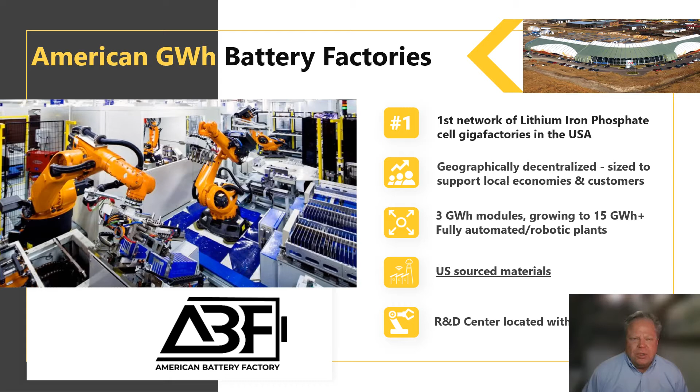The U.S. should support cell production, which uses lithium iron phosphate chemistry, or simply LFP, not just because it's an American invention, but because it's safe, mature, low cost, has wonderful longevity, can be 100% charged, doesn't contain nickel or cobalt, which is a near conflict material primarily provided by child slavery.

LFP cells are ideal for use in multiple markets, including the following three: first, electrification of a wide range of transportation modes, such as trucks, buses, and agriculture vehicles; number two, energy storage; and number three, U.S. military and government applications. There is no volume production of LFP cells in America today.

U.S.-made cells are absolutely needed now in massive volumes and will continue to be in demand for many years to come, especially as the chemistry is enhanced with U.S. innovation. American capital markets should embrace U.S. cell manufacturing.

Also, the U.S. government should provide loan guarantees and grants in a rapid processing mode to support the CapEx heavy, fully automated robotic factories. Just to give you an idea of cost, American Battery Factory's modular gigawatt plant starts at about $500 million and grows to about $1.9 billion or more.

With a national network of decentralized factories, government financial support would go a long way in scaling American cell production capacity and allow U.S. companies to compete with Europe and Asia, where vast amounts of government capital are currently available. The U.S. is about a decade behind Europe and double that of Asia in creating a battery ecosystem.

The U.S. can absolutely leapfrog ahead to a position of global leadership if we take a distinctly American cooperative approach to this challenge. We're actively looking to form partnerships with the U.S. government, laboratories, and R&D centers, along with those both upstream and downstream American suppliers of battery materials and services. Please join us.

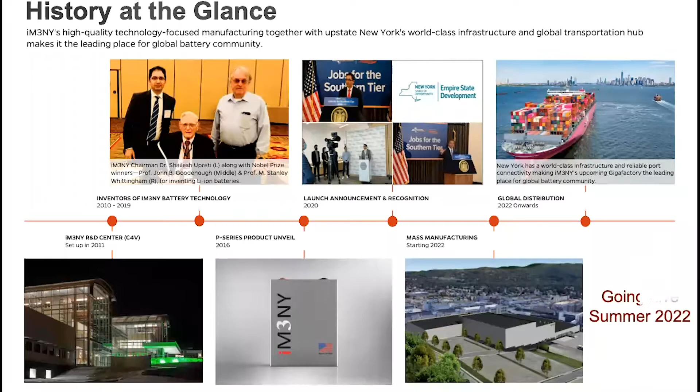A quick glance to our journey so far, from our birth to the start of our first gigafactory going live this summer. Our first commercially available technology is a cobalt and nickel-free, high-safety lithium-ion cell built with a solid domestic supply chain. Our cathode, anode, electrolyte, separator are all manufactured in the US.

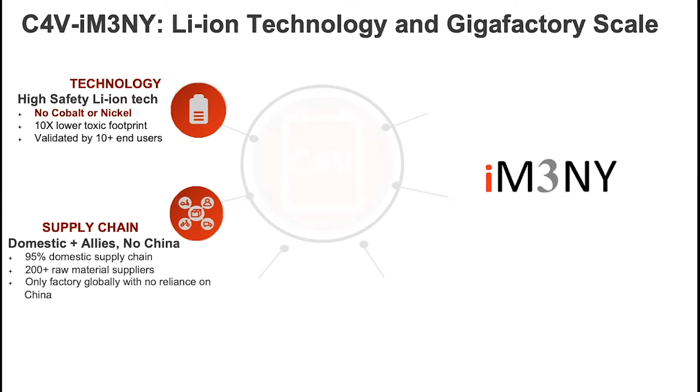Our vision is supported by 200 plus raw material and equipment suppliers today. We have raised a good amount of capital to support our vision. At iM3NY, we have also secured large cell supply contracts. A strong R&D and manufacturing team has taken charge to make it happen right here in America.

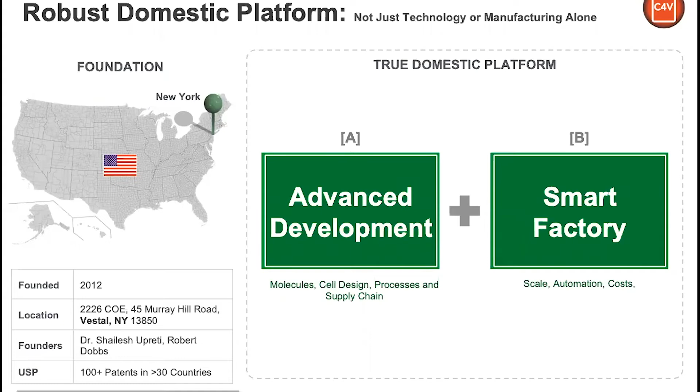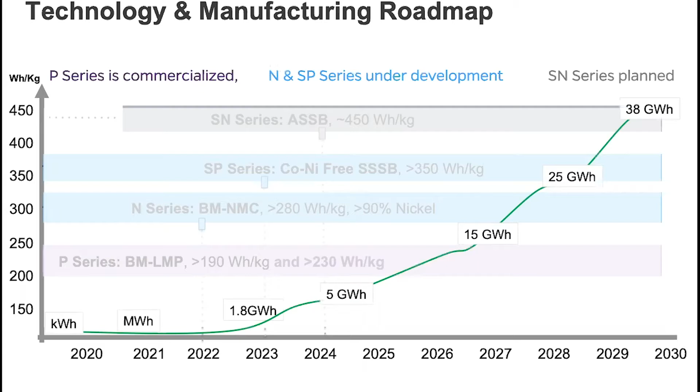A solid domestic platform not only includes advanced R&D activity, but also a full smart manufacturing solution to scale the manufacturing up and drive costs down. We are aiming to grow to 38 gigawatt hour as the first gigafactory starts ramping up to its nameplate capacity of 1.8 gigawatt hour this summer.

As we build a cost-effective domestic solution, we strongly believe market buys what is available and not the best. We continuously innovate cobalt and nickel-free solutions to support the market needs, including a cobalt and nickel-free solid-state solution. Here is a quick demo of our system-level solution with our exciting BMLMP technology. We are C4V, innovating molecules to machines to establish a lithium-ion battery technology ecosystem.

Today, we are introducing Lyten, a unique cell technology platform. Lyten brings to you a cobalt and nickel-free lithium-ion battery cell technology, providing 40 to 50% higher energy and 5 times more power density than LFP.

Lyten is the first ever tabless prismatic design delivering extra fast charge benefits. With cell-embedded cooling loops, Lyten eliminates the need for a complicated thermal management system. The low-carbon and toxic footprint makes Lyten one of the greenest possible battery technologies.

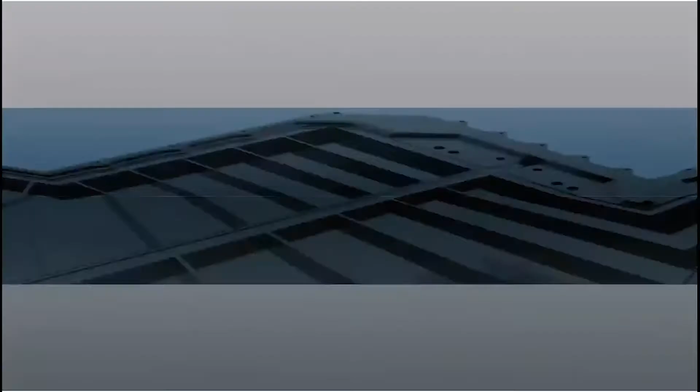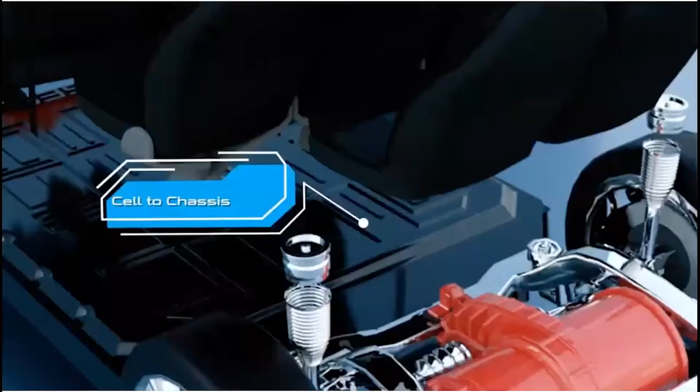Built with a robust domestic supply chain, the profiled architecture makes Lyten one of the best designs for solid structural stability of a battery pack. Lyten brings freedom from modules to deliver industry-leading cell-to-chassis and cell-to-pack performance, exceeding the majority of packs available in the market, irrespective of chemistry. Lyten also comes with inherent exceptional safety owing to C4V's oxygen-deficient BMLMP chemistry.

C4V is committed to deliver safety and performance. With Lyten, we are charging ahead. Feel free to reach out to us. We will be happy to provide you a true domestic solution for your energy storage needs.

My name is Nathan Millecam. I'm the CEO of Electric Power Systems. We currently provide energy storage systems. We provide modules and then charging services and infrastructure focused on the aerospace industry.

So EP Systems is a category leader in providing electric propulsion systems focused specifically on battery modules and integrated pack designs. We are going after a $3 trillion marketplace, and we are currently backed by some of the most reputable and credible investors in the world, such as Boeing, Safran. We also have one of the largest automotive manufacturers.

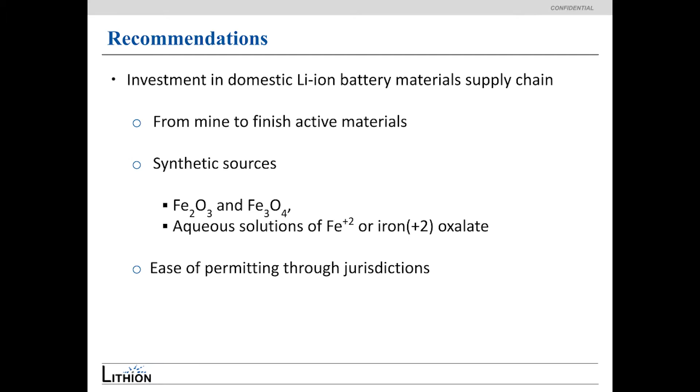Domestic availability for lithium carbonate is limited. North America has not historically been a significant producer due to a lack of developed resources. With increased global demand, spodumene deposits in Canada and Nevada and brine deposits in Nevada and Mexico, or even synthetic methods, can be explored.

Developing North American suppliers of critical materials, components, and infrastructure, including state-of-the-art equipment, will help address current supply chain issues. On the supply chain side, the U.S. has strong competencies in material science and chemical engineering, but lacks an experienced cadre of engineers familiar with the synthesis and production of battery materials at the industrial level.

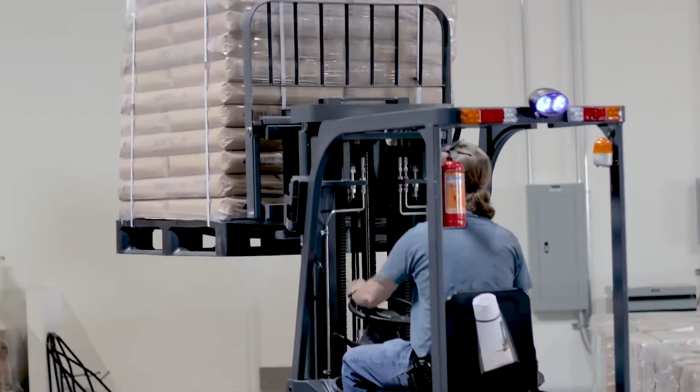Continued and increased financial support for this community is critical to remaining competitive in the lithium-ion battery industry. Lithion is committed to building its LFP cell manufacturing facility in an economically disadvantaged area and achieving the goals of the administration's Justice 40 program.

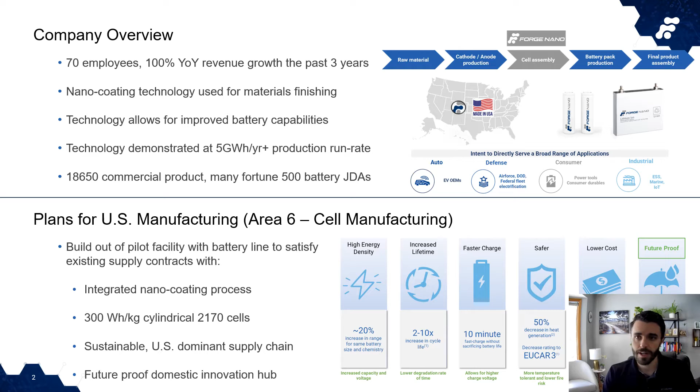Our challenges are not a surprise. To execute on our existing and growing number of agreements, we must obtain funding for equipment, materials, and testing, as well as hire and train a complete workforce. We have U.S. and allied partnerships already in place to execute our plan and just need funding to move things forward to be able to deliver our products sustainably.

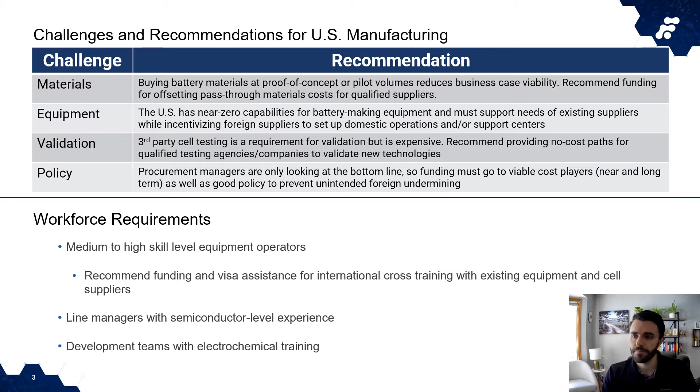We're already working with local universities and national labs, as well as the state government, to develop our labor force, and our company was actually founded to address environmental issues. We already have a long track record of successful engagements with the DoD and DOE and intend to provide a medium for future workforce training and data sharing to ensure national energy security.

We have plans in place to deliver the safest and highest quality cells and have a flexible product adoption model to enable the most timely adoption of these industry-leading batteries. With that, I appreciate your attention and I'm excited to answer any further questions.

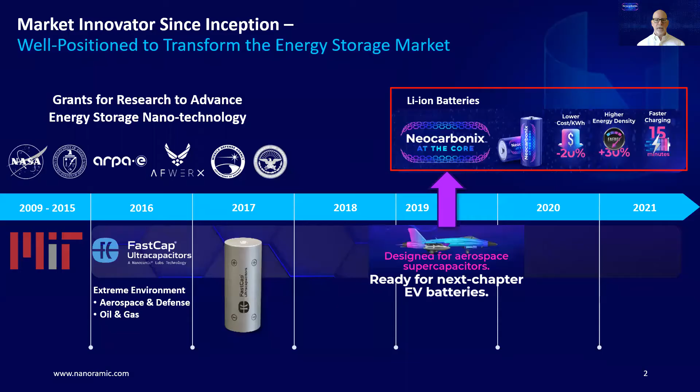As you can see in the red box, our Neocarbonix technology has been very successful in lowering cost, increasing energy density, and delivering faster charging. The core of our technology is the removal of PVDF polymer binders and the toxic NMP solvent. Neocarbonix is a 3D carbon binding structure, and it has worked with all cathodes we have tested, including NMC, LFP, LCO, and others.

On the anode side, we have developed silicon anodes with more than 50% silicon. You can see an example of our current energy density for NMC with silicon: we are greater than 320 watt-hours per kilogram and 820 watt-hours per liter. Our research shows additional increases of more than 10%.

Neocarbonix is an environmentally friendly technology. Since there are no plastic binders or toxic solvents, recycling will be more efficient. The manufacturing process uses eco-friendly solvents, and the faster drying time uses less energy.

Overall, we estimate a 30% reduction in energy consumption, leading to a lower carbon footprint.

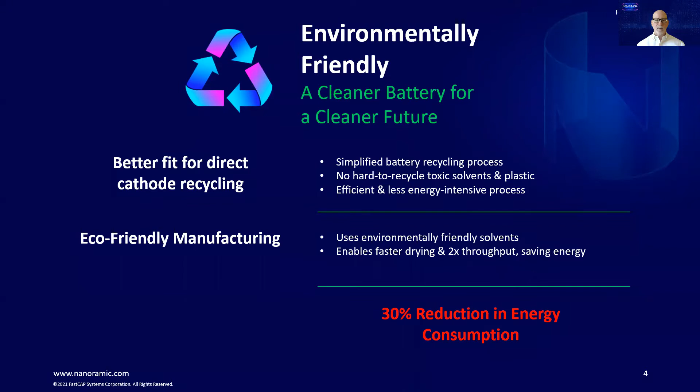The Gigafactory will combine Nanoramic funds with North American customers. We're asking customers to invest in the factory to secure supply—the more they invest, the more supply they control. We will then request a matching grant from the US government to complete the funding.

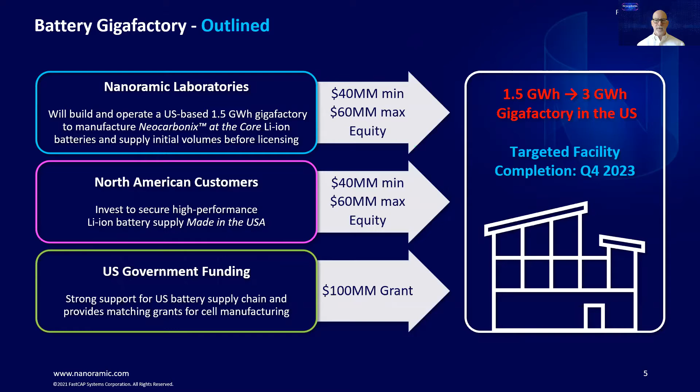This amount of funding will allow us to build a 1.5 to 3 gigawatt-hour factory in the US. Our goal is to have a versatile factory with longevity, targeting flexibility with different electrode chemistries and various cell types.

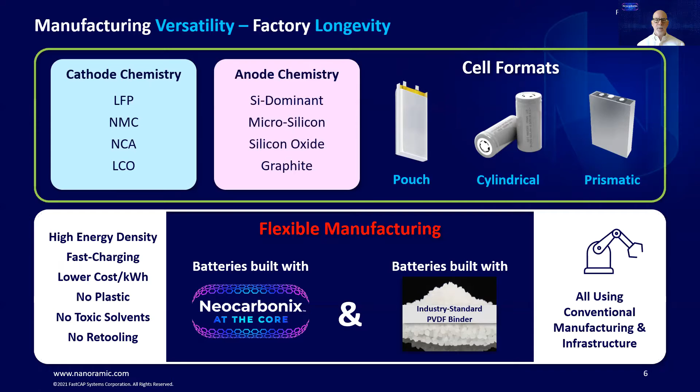For certain legacy products, such as those required by the DoD, we will continue to use industry standard PVDF where necessary. To move forward, we must find partners who will invest a minimum of $10 million for guaranteed production. This could be DoD, other underserved markets, and limited prototyping for EVs.

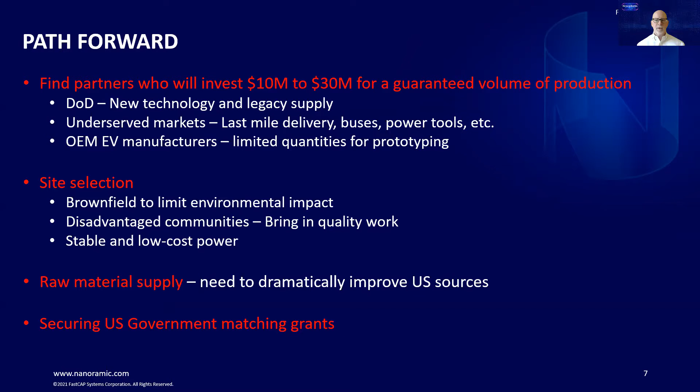Site selection is focused on brownfield, disadvantaged communities, and stable, low-cost power. We must work with and help establish raw material supply in the US, and we need to secure government funding.

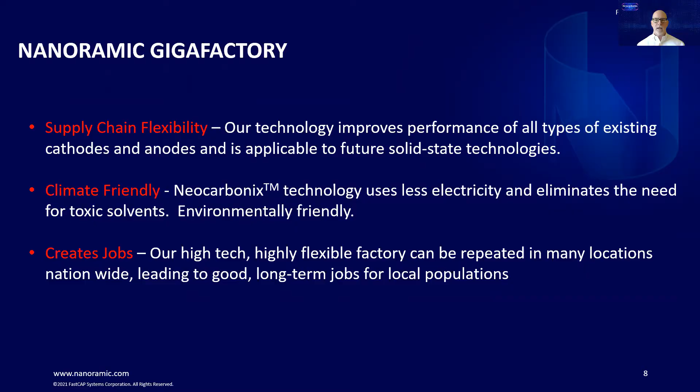Our Nanoramic Gigafactory has supply chain flexibility, which will support US sources. It will be climate friendly and will create good long-term jobs in the local economy. Thank you very much, please contact me with your interest.

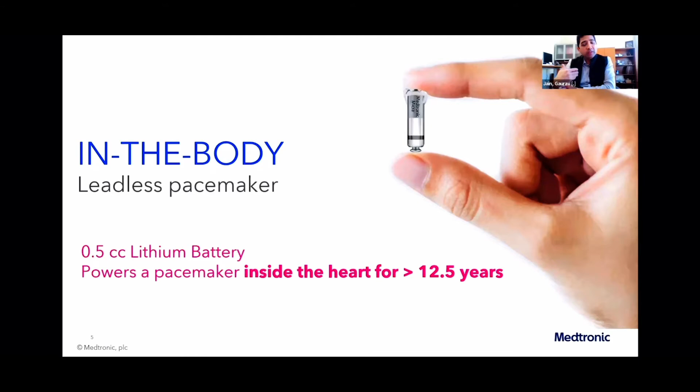This is a tiny battery that goes inside a pacemaker, which is inside the heart, and keeps it beating for over 12 years in most cases. This is technology we have developed internally, but we rely on a lot of suppliers for the materials and many of the components that go inside the battery.

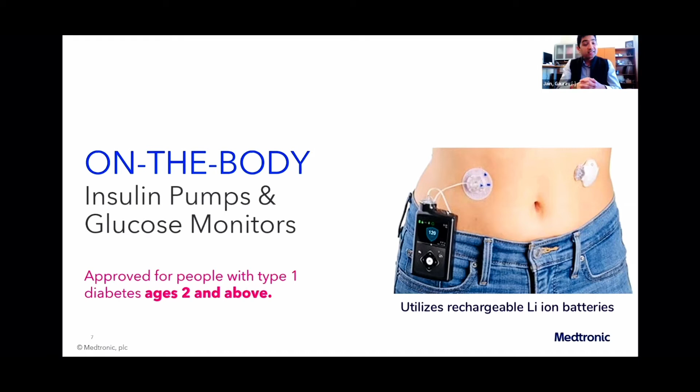A different example is a wearable product. Imagine a patient with diabetes, or a child with type 1 diabetes, where parents have to do multiple pricks to measure glucose levels and worry about long-term health. Contrast that with a wearable device that mitigates that concern for the patients and the child.

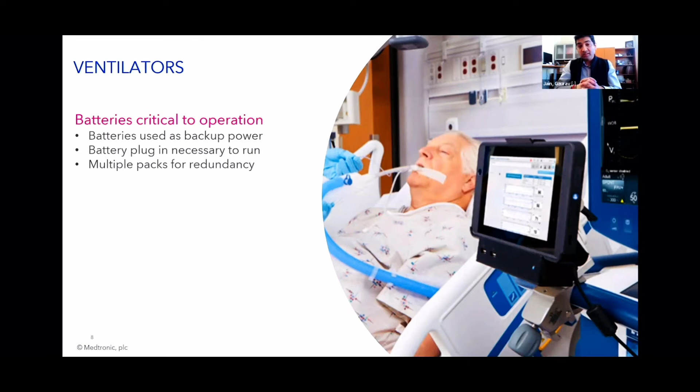Ventilators are a different area, but again batteries are critical. We don't want any interruption in power to interrupt the ventilation supply, and hence batteries in most designs are necessary to run the ventilators.

Put it all together, and this means we are really dependent on battery material supply, battery cell supply, and battery pack supply. We have strong partners in Asia today, but long term we'd love to partner with the broader industry and this initiative, first to bring our own expertise to bear for long-life, highly reliable batteries, but also to help develop suppliers through strategic partnerships with other industry players, to make this area healthy for this part of the world and serve our patients who are critically dependent on battery technology.

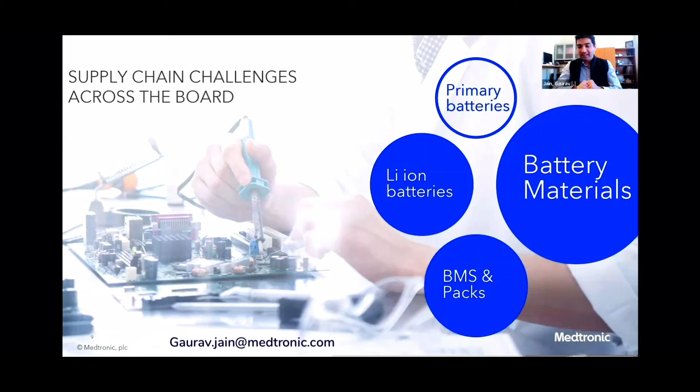At Anthro Energy, we are utilizing advanced polymer materials to create batteries that are flexible, safe, and high performance. Our vision is to create conformal energy storage to power the next generation of wearables, medical devices, flexible electronics, IoT devices, and more. We are currently in the prototyping phase and are commercializing our technology with support from the Activate Fellowship, funded by the DOE.

And the National Security Innovation Capital, funded by the DoD. We're currently shipping prototypes to customers via our demo kit.

Anthro Energy's plan to scale up involves contract manufacturing, as our battery fabrication process utilizes the same equipment and steps as conventional battery cells. However, according to our knowledge, there are no large-scale battery manufacturers in the United States who specialize in making lithium polymer pouch cells in sizes appropriate for wearables and consumer electronics. This has forced us to look overseas for manufacturing and scaling partners.

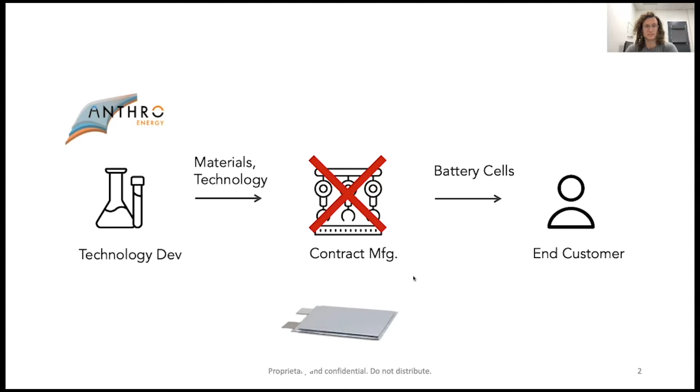At Anthro Energy, we believe that developing domestic manufacturing capability to power our smartphones, medical devices, wearables, and IoT devices is as important as developing manufacturing infrastructure for EV cells. In addition to funding infrastructure for low to medium-sized pouch cells, we also need to invest in battery manufacturing technicians to operate these lines. Small size batteries often require more customization compared to automotive batteries, creating a need for more battery engineers and automation engineers. These batteries are often sold for higher margins compared to EV cells, which opens opportunities to create high-paying jobs within the community.

At Anthro Energy, we have a long-term vision of strengthening the domestic LIB supply chain by building out our own pouch cell fabrication line. This will be critical to power our connected devices and further U.S. innovation in power sources for these important applications. Thank you.

Hello, my name is George Little, and I work at Lyten, an advanced materials and EV battery company based in Silicon Valley. We're a 7-year-old company that exited stealth mode late last year.

We've raised over $200 million in funding, and we believe we're cracking the code on how to develop commercially viable lithium-sulfur cells. And the way we're doing it is by using a completely new carbon material that we've invented and patented. We call it 3D graphene.

Our plans for establishing U.S. manufacturing are ambitious. We're well along in building a pilot production line at our main factory site you see here, and we expect it to be completed and operating sometime this summer. It will have the capacity to produce over 200,000 cells, or roughly 150 megawatt hours per year. Of course, we anticipate this being a stepping stone to building a US-based gigafactory sometime later.

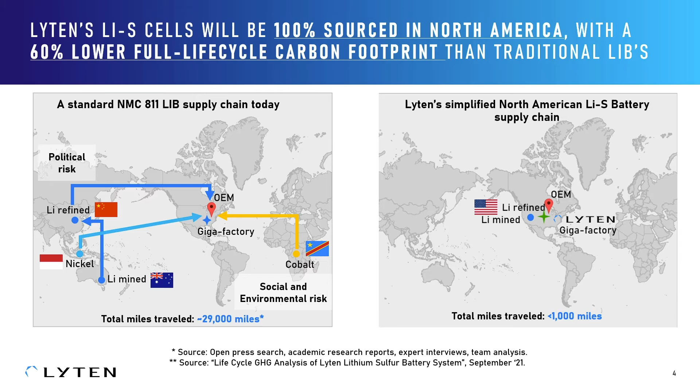As the slide mentions, a third party's research report states that our cell manufacturing carbon footprint will be 60% lower than that of traditional lithium-ion batteries.

One challenge we're facing is sourcing lithium metal, so one suggestion we have regarding government help would be to fast-track permitting of new lithium sites here in America. There are several projects under development, like Salton Sea in California and the Thacker Pass project in Nevada. These are just examples, but our main point is we need permitting timeframes that are counted in months, not in years. The critical path length to producing lithium is already long. Shortened permitting would be a huge help to domestic battery producers like Lyten.

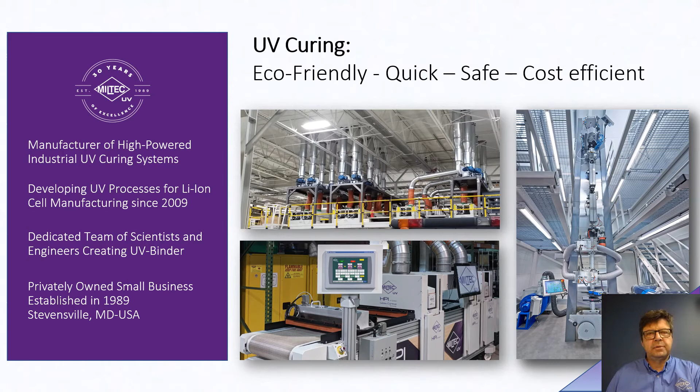Miltec's patented UV curing technology improves over current manufacturing processes for battery components in a number of ways. Firstly, we seek to remove toxic solvents from the coating process, making lithium-ion battery manufacturing safer for employees and less damaging to the environment. Miltec's technology allows us to substantially reduce the energy use and increase manufacturing speed with smaller equipment requiring less floor space and lower initial investments. These features allow for a significant reduction of manufacturing cost. Battery performance is equal or better than the legacy technology, and we focused to reduce the risk of implementation by making the technology compatible with most existing or planned equipment.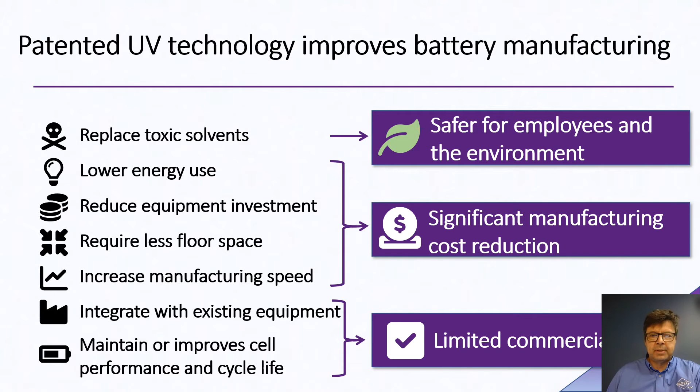From our perspective, the US battery industry faces a number of immediate challenges. Today, the US industry and research facilities seem mostly focused on development of the next generation battery technology. However, in order to compete with global manufacturers in the existing and growing market right now, we're lacking the required infrastructure and manufacturing facilities. Making things even more challenging is the limited capacity of US-based and international equipment manufacturers to even support the projected growth.

In order for the US industry to gain an advantage in the global market, manufacturing processes and their improvements are key. However, bringing new battery manufacturing processes from the lab to industrial scale requires levels of investment that small and mid-sized companies often don't have. Bridging the gap between research and full-scale production will be vital.

The situation for Miltec is such that we are seeing strong commercial interest in our products and technology. Unfortunately, however, much of that interest comes from manufacturers outside of the US. We would strongly prefer to work with US organizations to help those gain a cost and environmental advantage over global competitors. Also, unfortunately, we found it to be easier to demonstrate the use of UV technology and bridge the gap to manufacturing by using partners outside of the US.

Our recommendation is for the US to focus on the here and now. Implementing cost-effective and environmentally responsible processes are needed to compete with international manufacturers. We will have to rely on scientists, engineers, and a skilled workforce to accomplish this, so education, particularly focused on the manufacturing aspects for batteries, will be vital.

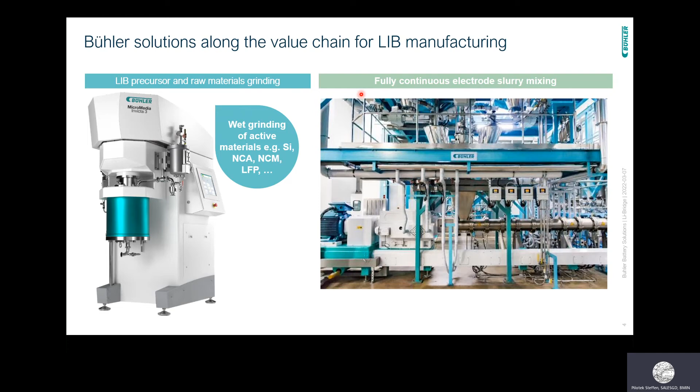In the field of battery manufacturing, we offer two distinct solutions. One for precursor and raw materials grinding, including for silicon grinding or LFP grinding. I would like to focus here on our solution for fully continuous electrode slurry mixing, which is a comprehensive solution starting from raw material intake, raw material dosing, and the mixing process itself, where Bühler offers a whole mixing plant.

This is a highly productive technology. We have more than 10 years of experience in this. This technology allows a fully continuous production of electrode slurries at an excellent dispersion quality. It's applicable to all electrode formulations, for example, LFP, NMC, NCA, but also solventless or solvent-free formulations. We've already realized lines with more than 2,000 liters per hour productivity, and we've installed more than 50 lines worldwide.

Now, we would like to bring this innovative technology also to the United States. A main challenge in this is a certain reluctance of established manufacturers to adopt newer technology. We see that some players rather stay with established and therefore outdated mixing technologies. With our approach, Bühler's workforce requirements include engineers as well as manufacturing staff, both on the mechanical side as well as on the electrical side.

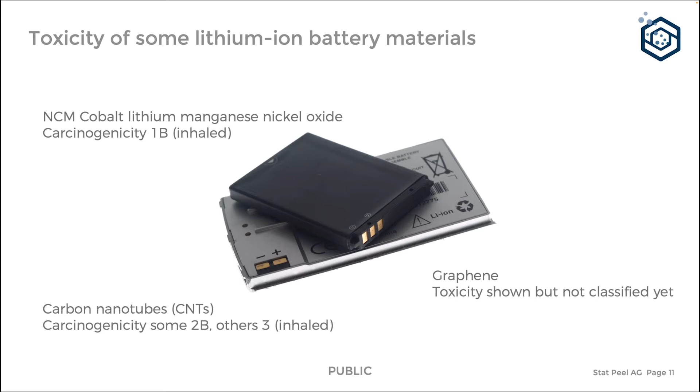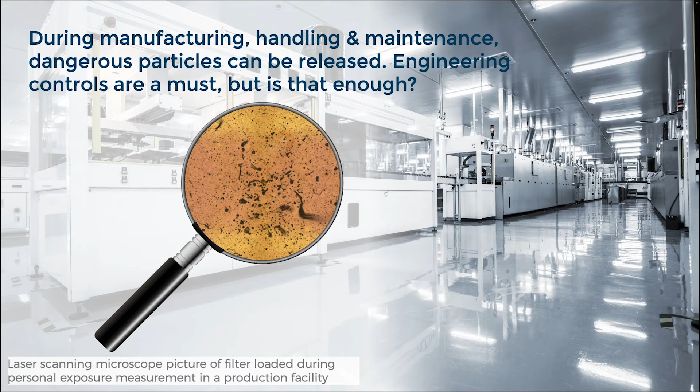I'm sure you're aware of the toxicity of some of the materials you're working with. Working with harmful material means to make sure you have as little release as possible. Obviously, in a production environment, you have to put all the necessary engineering controls in place. Nevertheless, it's very critical to monitor exposure even in such environments, because you cannot be sure that you have no release. To ensure the health and safety of your employees, you have to conduct aerosol measurement campaigns.

Today's instruments cannot tell you the harmful contaminants among all the other background particles. Personal exposure monitoring is a laborious and slow process. People have to wear heavy pumps with large filters, which are then sent to a lab for inspection.

To address those issues, we came up with an integrated system. It's called the identifier. There are three components to the identifier system: a filtration slide as a consumable, a wearable badge, and a benchtop reader with a built-in Raman spectrometer and an industrial PC.

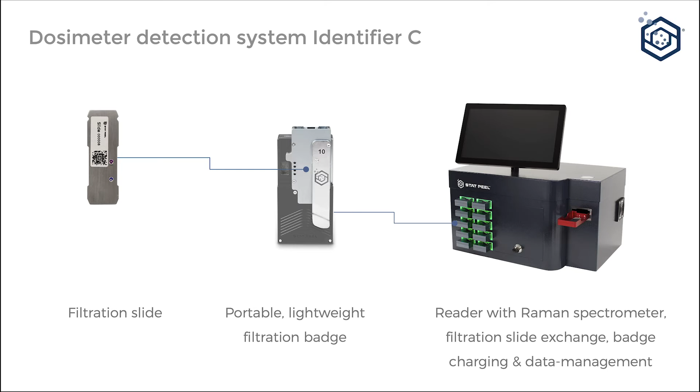The system can be operated by any user without any prior training necessary. It features lightweight badges that can be worn throughout the day to measure personal exposure. The loaded filters are inspected by the reader, and the exposure is calculated right away. This means you get fast results and all the data remains in-house.

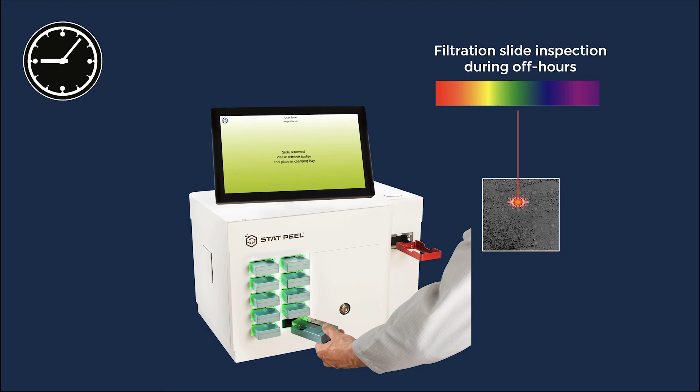As said before, the identifier can be operated by any user, but only the health and safety specialist has access to the data.

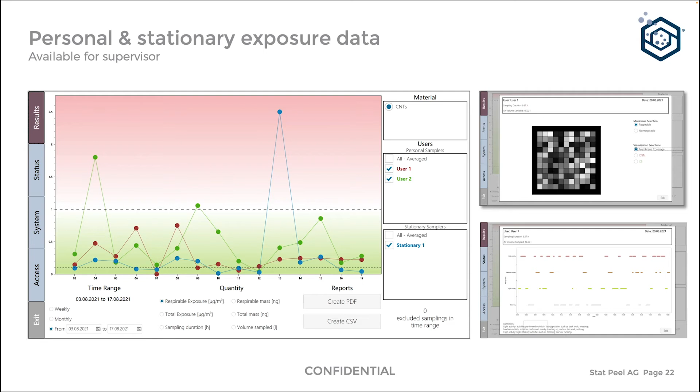With the rush to build up the huge production capacities needed to transition to electromobility, it is extremely important not to forget about health and safety. I think it would be a worst-case scenario for the industry if, by rushing to meet the green and sustainable goals, the workers involved would pay with their health.

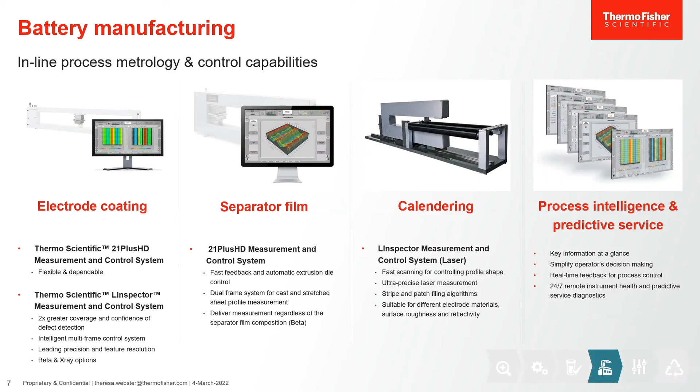I'm Lindsay Gorrill, co-founder and CEO of KORE Power. KORE Power is a US-based cell battery technology company. We have customers all over the world in energy storage, EV charging, and e-mobility. And KORE Power provides the backbone for decarbonization. Cells are really the key for reaching widespread electrification.

We're building a state-of-the-art 12 gigawatt-hour battery cell factory in Arizona. We believe that we are a catalyst to a green earth. So we are building it carbon neutral with solar and storage cogeneration, the first of its kind in our industry, and I hope others will follow. If you are a green company, you should do everything in your power to manufacture in that way.

Supply chain challenges that we are facing in our industry are real, like people in other industries. If we don't have a concerted effort to alleviate this, it will not get better. I sit on the Department of Energy Battery Roundtable, and I sit on the Advanced Battery Roundtable with Select USA. And I've outlined what I think is a very solid way to take care of our supply chain issues.

That pertain to lithium-ion cells, we first need to identify the future requirements from an upstream to midstream perspective. And what I mean by that is from mineral to cell, right? You need a concerted effort to achieve this.

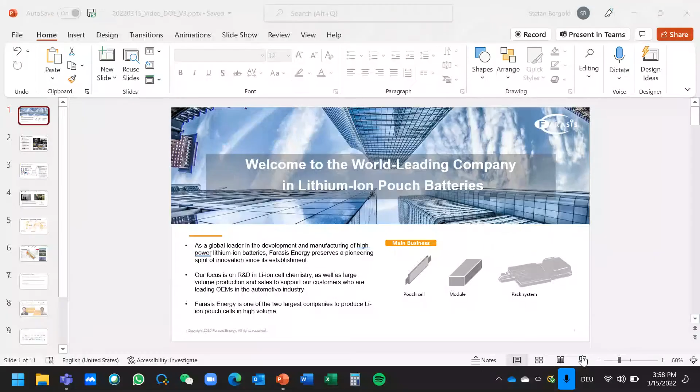Farasis is a global leader in the development and manufacturing of high-power lithium-ion batteries. We are focusing on the research and development of the cell chemistry, as well as on the mass production of the related cells, modules, and packs. Farasis is one of the two largest companies in the world to produce lithium-ion pouch cells in high volumes.

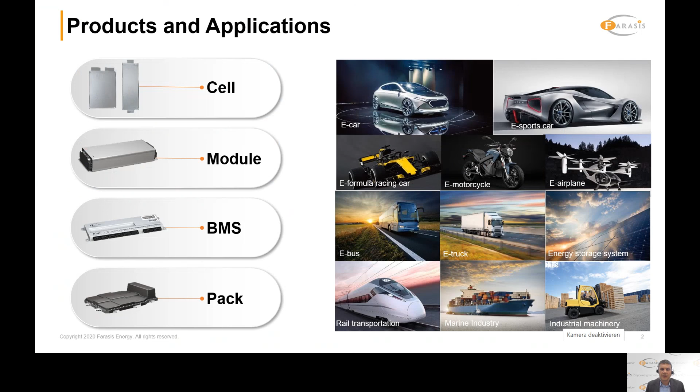As of today, we have 4,500 employees and an installed production capacity of 21 gigawatt hours, with a clear path to extend this production capacity to 150 gigawatt hours within the next years. Our batteries are used in passenger cars, as well as trucks, buses, helicopters, motorcycles, industrial machineries, and other vehicles.

We have a strong R&D network with most of the American research and development institutes and also foreign institutes, including the Department of Energy and also the USABC. Under the guidance of the USABC, we are running two development projects: one to develop new cell technology and the other to develop new recycling approaches.

We have multiple customers worldwide. Our most important customer is Mercedes-Benz AG. With Mercedes-Benz, we have a strategic partnership which includes: number one, the supply of the batteries; number two, the CO2 neutral production of the batteries according to customer demand; and number three, the participation of Mercedes as one of our shareholders and the nomination of Markus Schäfer to our advisory board.

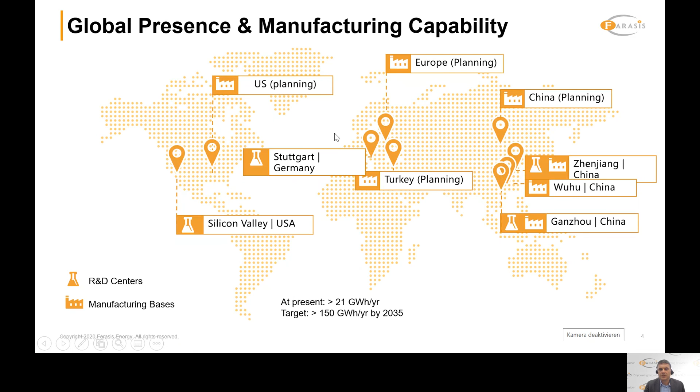We have a global production network in Asia and in Europe, and we also want to expand to the United States. In these projects, we plan to bring our existing production technology and know-how to the United States market. We want to help establish a domestic lithium-ion battery supply chain, reduce our dependency on foreign countries, and grow the battery business within the United States. We are pleased to see DOE's leadership to create a domestic lithium-ion battery industry, which has successfully been done in other regions of the world before.